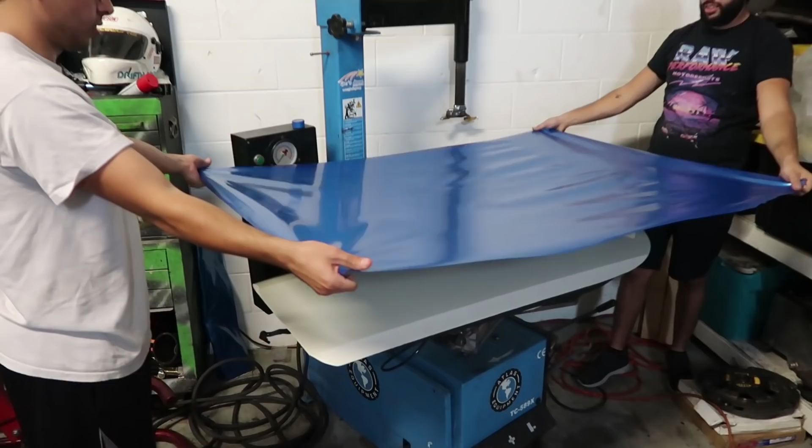Tandem number 2, okay ready? You're gonna pull all the way apart. Towards you and to the side, like this. Okay, go, pull, and then your left hand down a little bit. There we go, ready? Go down, down, down, down, go down, go down.

Alright, that's pretty good, you're good. You can let it go. That's pretty good, the wrinkles are for speed. It's ribbed for our pleasure.

Oh God, so what else are we doing today, Matt? Well, what aren't we doing?

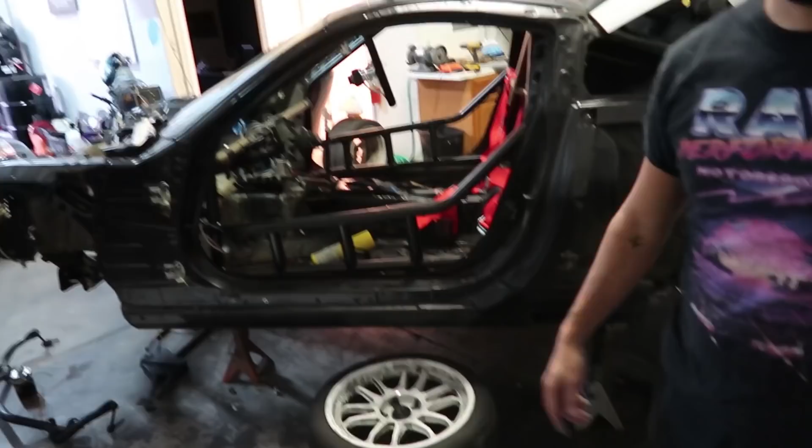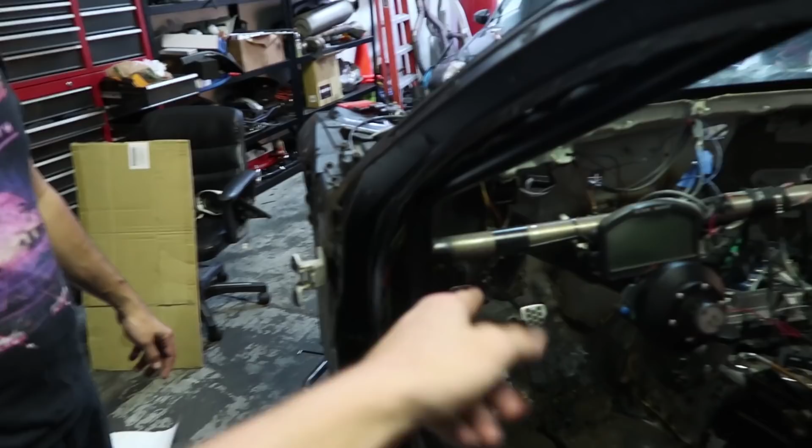Actually, you need to do your clutch pedal. I need to do my clutch pedal. I would like to. So my clutch pedal broke, I don't know if you've seen that. I don't think they have. So like I'm getting carried away. My clutch pedal broke at the only event we ever tested this at, and we welded it back together for that one little fun run with Adam that one time. I was like, I'm just gonna go send it. So we're gonna fix that.

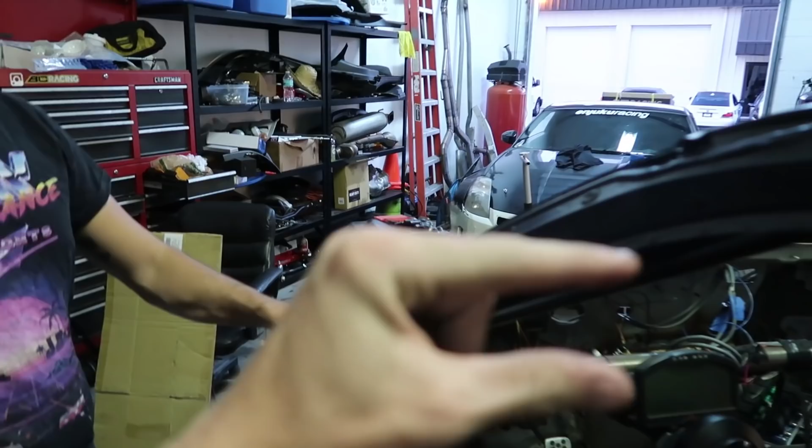What I want to do is actually make one out of steel and thread it nicely, put it all together, because it's essentially like a U, and on the bottom of the U there's a threaded portion that goes up. The U goes around the clutch pedal, and the U portion with the thread goes into the shaft of the clutch, like the master cylinder.

Okay, you're talking too much, take it off and show them physically. That'd probably be easier, some people are audible people, others I guess, if everyone sees it then you can see it. Yeah, you can say it while they look at it. But they're getting to wrapping over here. Come here, I'm going over here.

Where you can see the motor is almost in. Well, it's like a couple nuts and bolts, just a couple. Boxes are here, boxes of almost everything are here. Parts, bunch of goodies that we'll get into later. It's used. I also have parts of my car that I haven't shown you yet. Okay, you need to get those out, scratch them off the line.

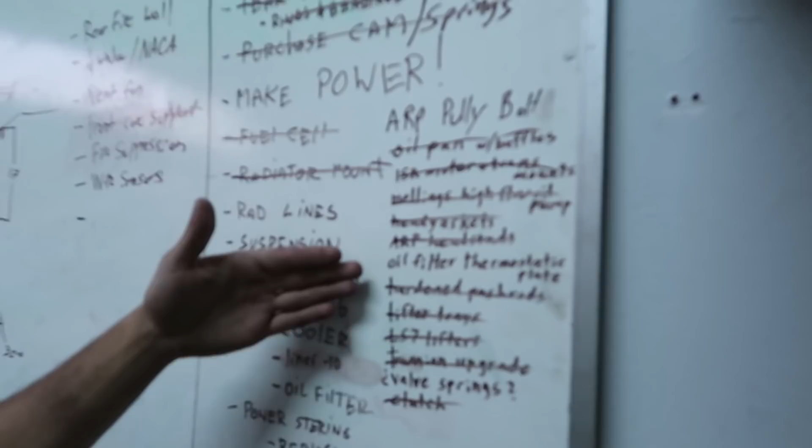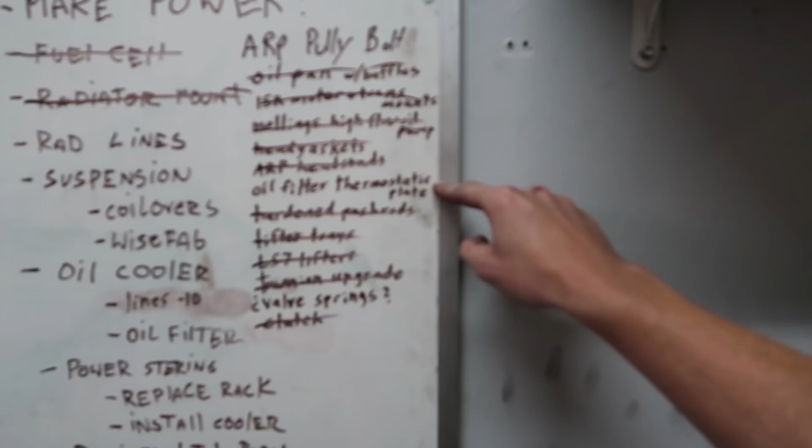All right, so all this stuff is ordered, and here, and here, yeah. This thing, we'll get that locally. I still gotta order that. Yeah, I ordered comp cams, hooked it up with cam too, right with here, cam and springs.

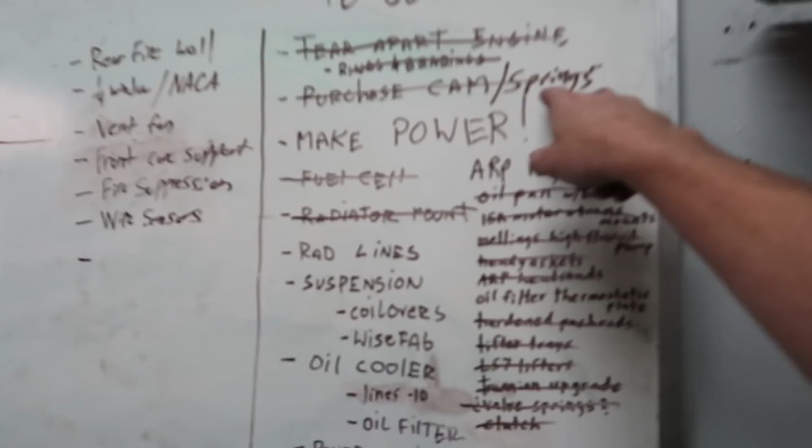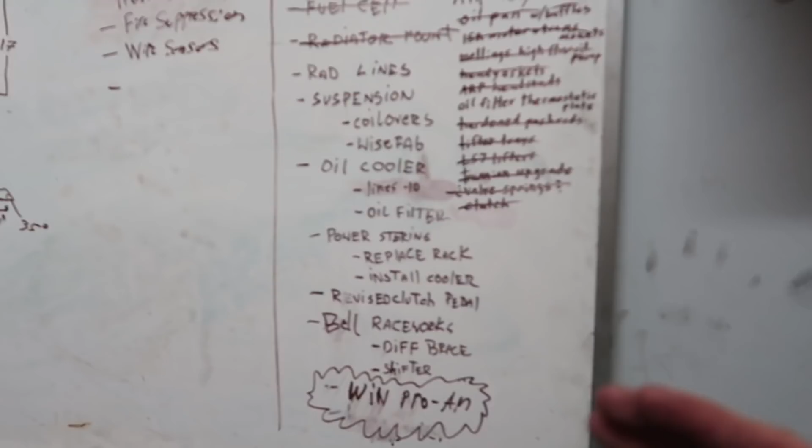Oh yeah, valve springs. So with comp cams, they came out with like a new drift spec cam, and what it is, it's a cam that you can essentially drop into a stock motor. I opted to upgrade valve springs because that was one of their recommendations. The other thing is the timing chain. The timing chain we had decent tension on, and it looked new since it was like a fresh build, so I opted to not do the timing chain, but I did springs.

I'm gonna do their comp cam. I guess Marco puts the link with, I don't know, something, and they're like mild specs, it's like a 541 lift.

I'm a little worried with Hasm back there handling that big stick. I don't know how I feel about it.

But yeah, so we're gonna put that cam in, and I don't think anyone has ran it yet, it's like a brand new cam, brand new by them. And it's supposed to be just genuinely all around kind of bring up power from like 3,000 to 7,000 RPM if you're gonna run that high. But it's just a mild cam that you can drop in, no other upgrades whatsoever, and it'll be great for like a grassroots series or mild competition, which is what I'm gonna be doing.

Or even guys that want to do some road course stuff that don't really want to do a total overhaul on their motor and heads and everything, and they just want to make a little bit of power all around without having to spec out a cam. Basically, it keeps the LSA around 115 and just gives you lift and duration. So most cams out there, even if they're mild, they lower the LSA because they want higher power at the top end of the RPM.

What is LSA? Lobe separation angle - has to do with the lobes on the cam. I don't necessarily 100% understand it, I just kind of know what it means. But basically a higher number gives more of a linear torque band. Mine is the same on my S13. Most people for drag racing run like a 111, 112, or 110 - they get real low and their line is more steep. So they have less power in the bottom range of the RPM but more power in the top range, which is good for drag racing because you won't lose grip launching off the line, and then you make all that power after you've caught grip. But for us, which are drifting, you want to gain grip all around, especially in drift, which is loss of grip. I'd rather have a little bit of power everywhere than a lot of power in one spot - and that's what that cam does.

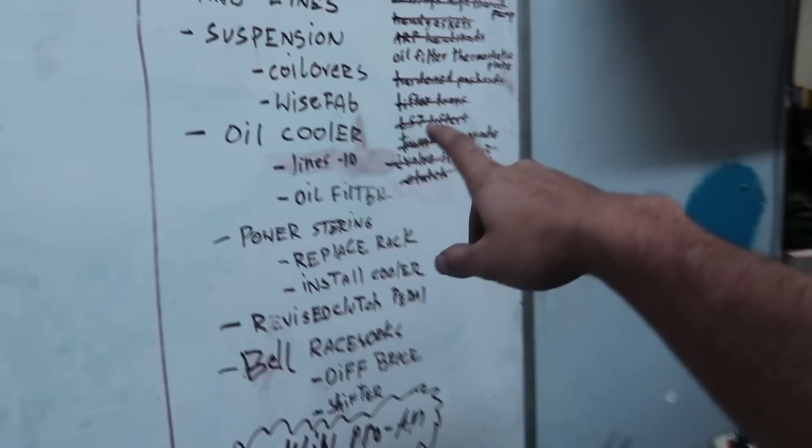Anyways, back to the list. There's a lot of stuff still going on - we're waiting. Well, we have those, but we don't have that, so we can't do anything.

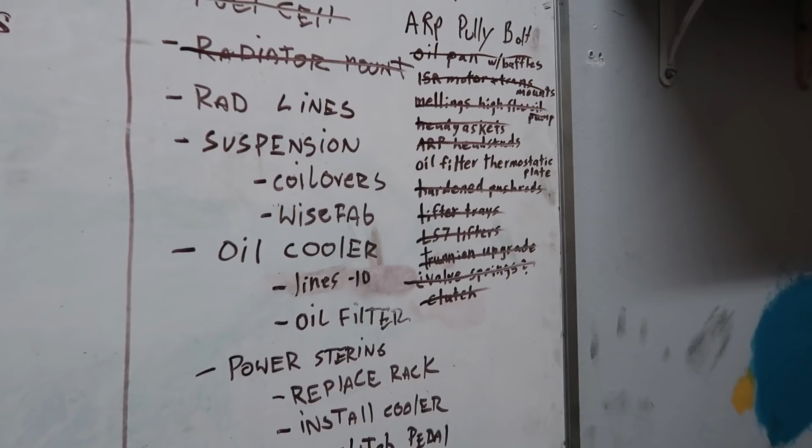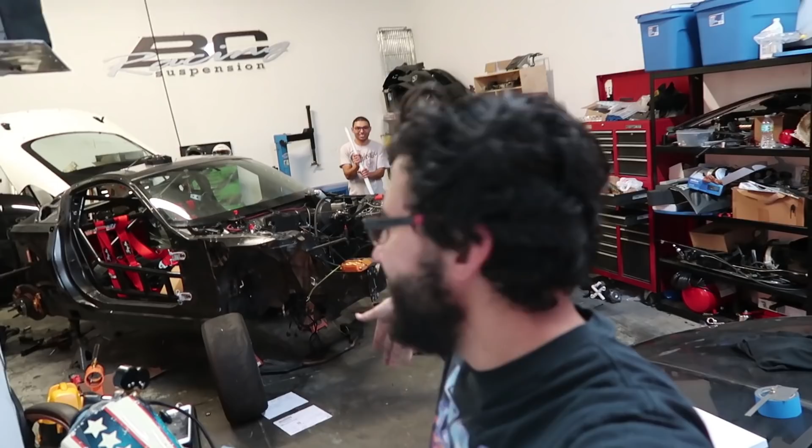Suspension is a blur - but why is that a blur, Marco? If only we had some sort of box over there to open. You know what, you can open it. Go ahead, yeah you can open it. We can open it, but the installation video won't be today because we have nothing else to attach it to. So like, what are you going to attach the top hat to the chassis and let it dangle? Dude, I just didn't want to look at it. Marco's been sitting here - it's been in the shop for like 5 days now and I haven't been able to. This is like Christmas to me, honestly. Hey, I'm sincerely - I've never messed with ERs either.

The cool thing about this, and why I have these ER series, is BC Racing hooked it up with not only one set of ER series, but 2 sets. So what I'm going to do is set up this car with one set of ER series, and set up my other blue car as well with ER series too. They'll be the same setup so I'll have the same chassis feel between both cars - except one will make 200 more horsepower than the other, and this one will make a little bit more grip because it'll be set up slightly different in suspension, but the car's feeling should be roughly the same. So when I go from that car to this car, it won't be as much of a learning curve as far as steering feel - the actual driving, throwing it in, catching, all that stuff will be the same, it's just powering out that won't be. That was my goal, because it's turning into essentially a party car / practice car where I can have fun and really push the limits in that car. And then once I push the limits there, I can come to this car having gotten a lot of practice in without putting a lot on the line.

You're taking way too long to open this box. Like no, to open this box. I know, each one is individually boxed. Oh, look at that - that's one corner right there. That's lighter than I expected, honestly.

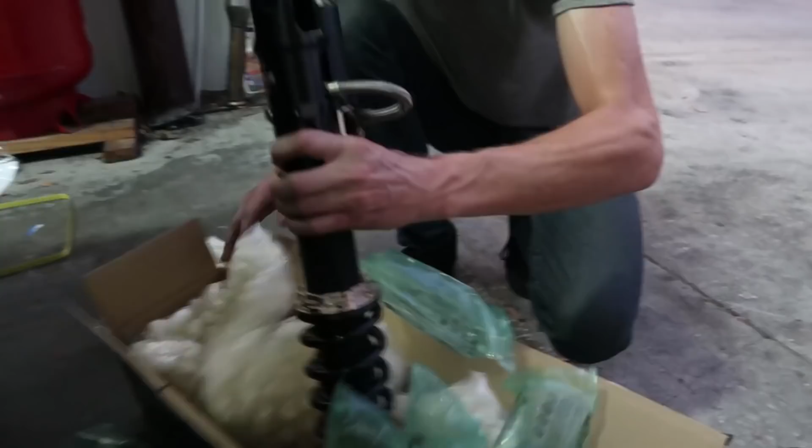Whereas with single adjustable, it's a percentage - the BRs and the DS series, everything moves together, so you can only adjust both in one direction or both in the other direction. But it's mostly rebound - the percentage is higher on rebound than compression. Also, what he didn't say, it has an external reservoir, which means more fluid, which means it won't heat up as fast.

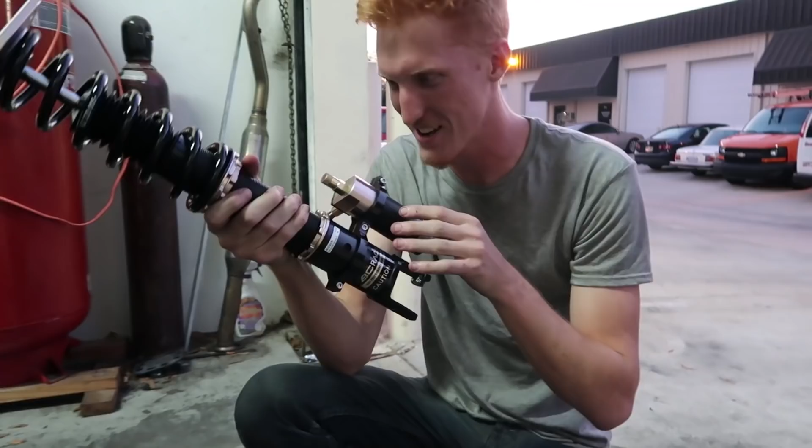It's good, it's so nice right now, I don't want to put it on the car. It looks really nice. That's a lot of travel. Is it max low right now? I don't know. Oh my god, your car's gonna be so high.

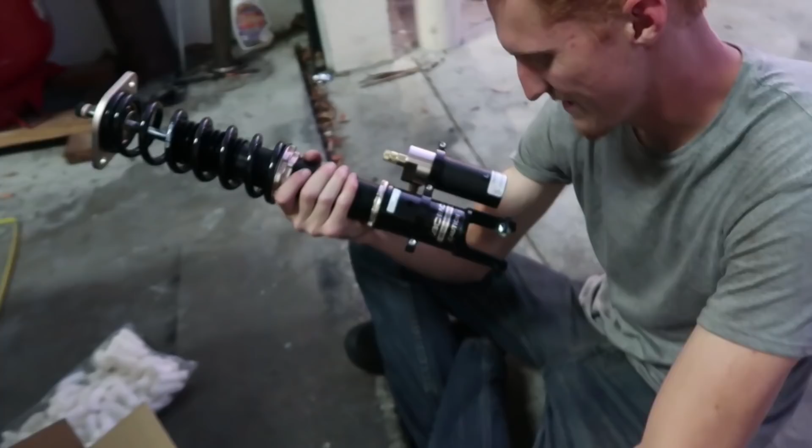So what does this do? This determines how much unicorn power the car has. And by unicorn power, you mean compression? No, damping. Compression? Damping.

Are you sure, Marco? No, I'm not sure. Because it says damping on the valve. Let me see - damping, damper, oh it says soft and hot, or high. This says damper too, but it's still compression and rebound, right? Sure.

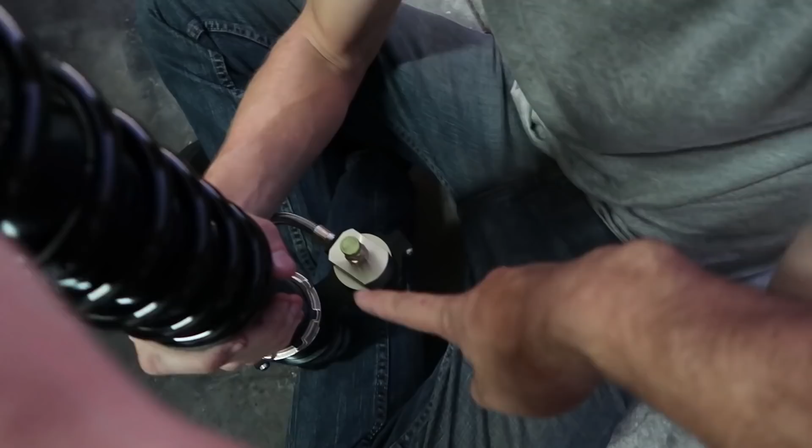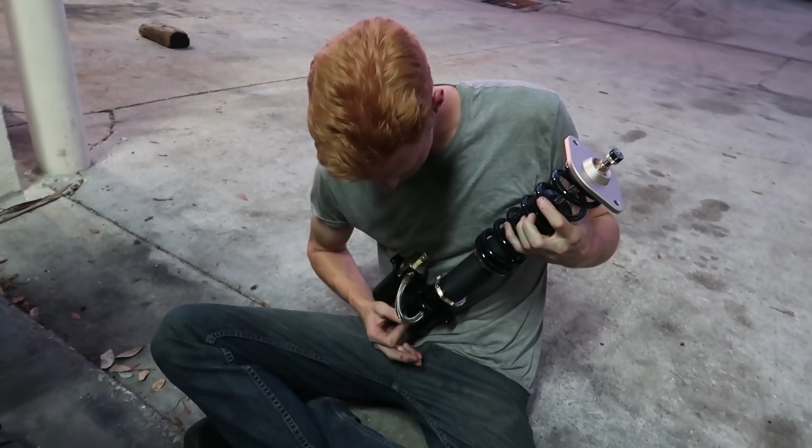Yes. I haven't read the manual yet, okay Marco? This is rebound, this is compression. So hold on, what's the difference? They're all damping, they're all dampening. Oh my god, they're dampening. They're long enough, Marco, you should play air guitar with them. Bow bow bow, oh it's probably like this. No it's like this.

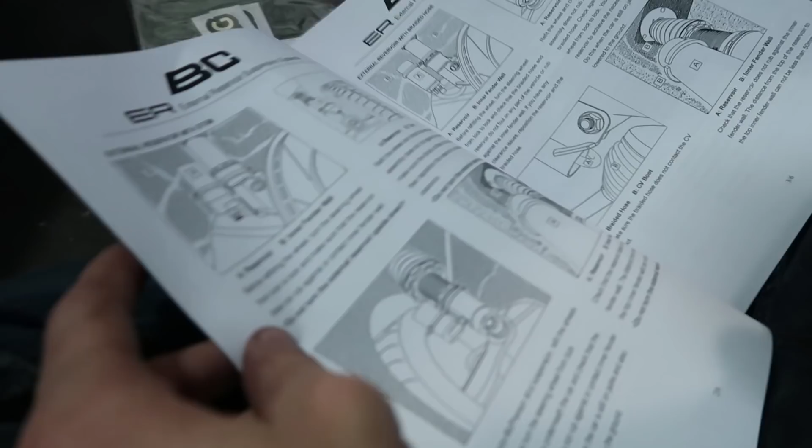I'm playing the banjo. This thing's long as fuck. Like every other car person ever, man throws the manual on the ground over there in the corner by the trash. I actually read the manuals. Okay, go ahead, let's look at it, let's see what it is and what you got to do and what it looks like. Oh, look at the pretty pictures, don't read this stuff, just look at the pictures. I know, well they didn't give me any colored pencils to color it all in. Oh, what if you do color it in? That'd be hilarious, and then we hang it on the wall. We're going to have to do that. We'll have Megan color it in.

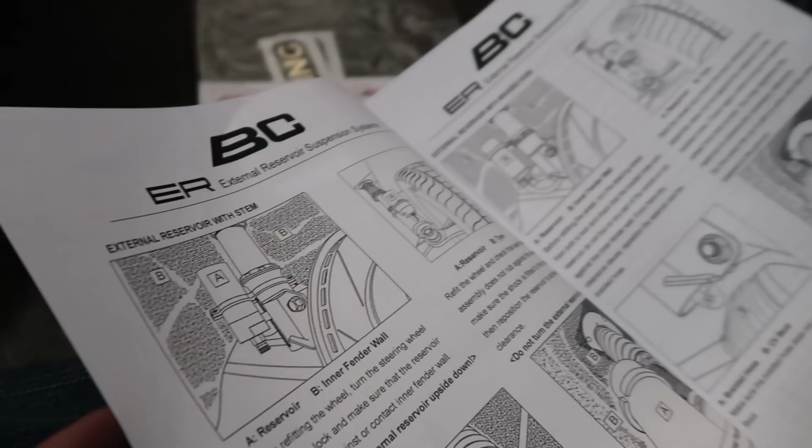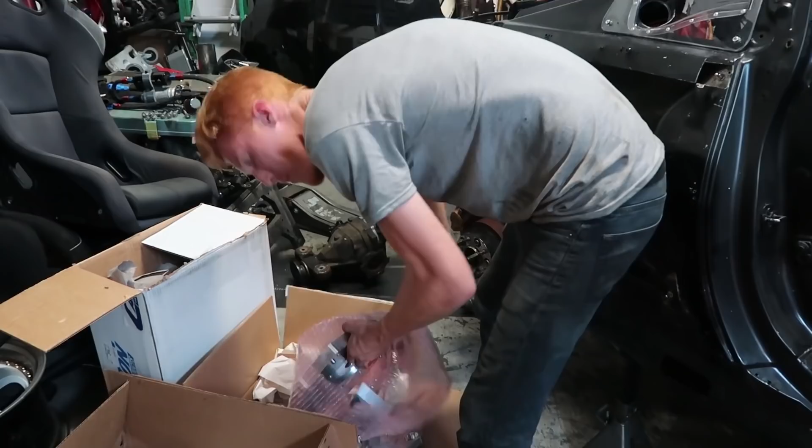So the dampening force - don't say dampening, there's no dampening - the dampening force is 30 clicks rebound on strut top like I pointed, and compression on canister like I pointed, and then preset on 60 clicks. 60 clicks, 60, oh my god, I'm done reading. That's it, y'all could just buy your own and read it yourself at home.

Matt got his old rack out and he put his new rack in. Rack out with your wrench. Also got some other cool parts.

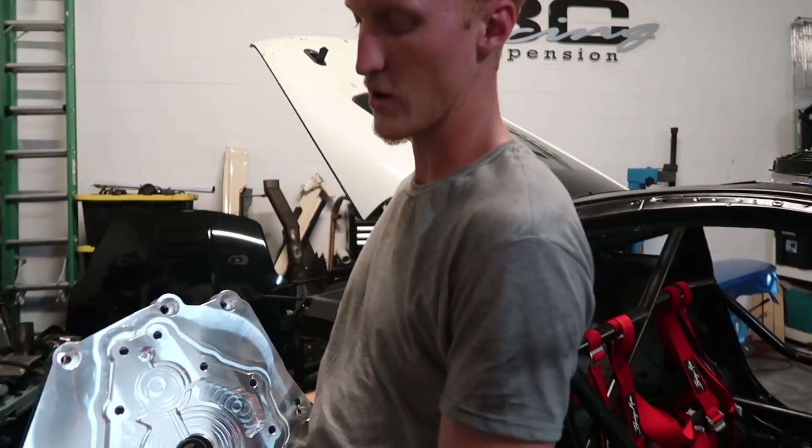This is from our boy Bert Collins over at Collins Garage. They do Collins adapters - adapters for everything, like if you need to go from a 350Z transmission to an LS, he's your guy. Well, anyway, this is a transmission cross member.

And I have adjustment there, so I can adjust that transmission - it adjusts depending on what motor mounts you have. If your motor mount sits your trans further back, then you put it further back; if it sits around there or forward, whatever. So not only this, but also we got a fresh adapter plate.

If I can find the opening. Come on. Quality bubble wrap, you're gonna get it out. Oh my god, it was just in there.

Anyway, why is it so warm? Oh, it's in my car. It retained all that heat.

So this is an adapter plate for the 350Z transmission. You cut your bell housing, and this part replaces that front piece - I guess it's not a pump seal like on automatic transmissions, but there's that front metal plate where your input shaft goes. It's upside down, isn't it?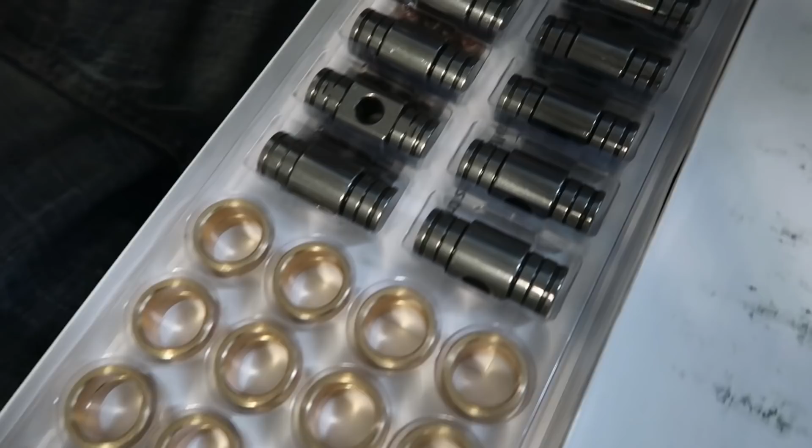Yeah, it's probably like this. Yes, because your clutch lines come out there. So this mounts up to a bell housing, and then that bell housing mounts up to your LS motor.

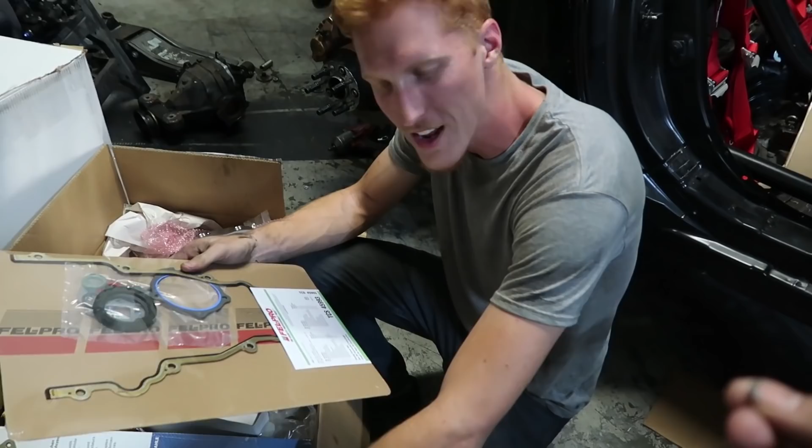Yes, Collins, so this is like perfect. So if you need to adapt a transmission - since we already have our 350Z transmission for these swaps - we just cut that bell housing, replace it with the adapter, and bolt it directly to the motor, and you're set up.

He makes a shifter relocation bracket as well, so you mount the shifter and relocate that. You're in it, ready to go, ready to party.

Hasm finally finished his door. It looks amazing. It looks way better than the other one. This looks so clean.

Look, there's no pimples. He's reaching that age where you just get a few pimples, but it's not a big deal - it's not like you're going through high school anymore. It's like you're in college, having a stressful week.

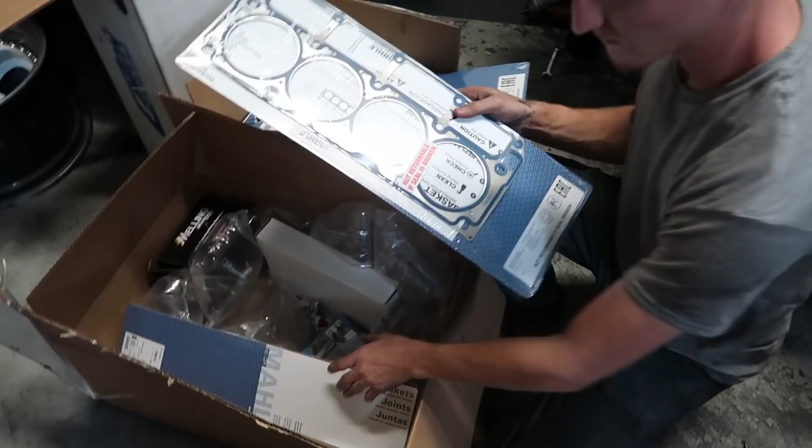Couple pop up. I do want to say though that Hasm did that mainly by himself. I helped him apply it in the beginning, and then he went and learned each corner. That was his first wrap job ever, so good job.

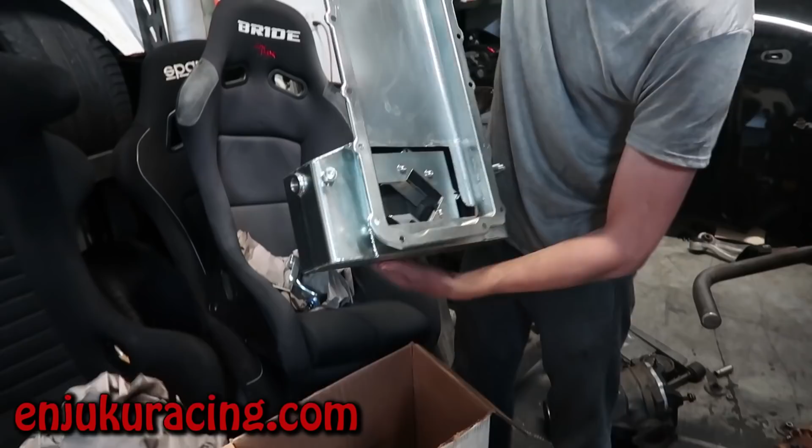And now you got the rest of the car to do. Good luck.

We also got the trunnion upgrade we were talking about, and this is the old rocker. We got to push it out - you can see the old thingies on there.

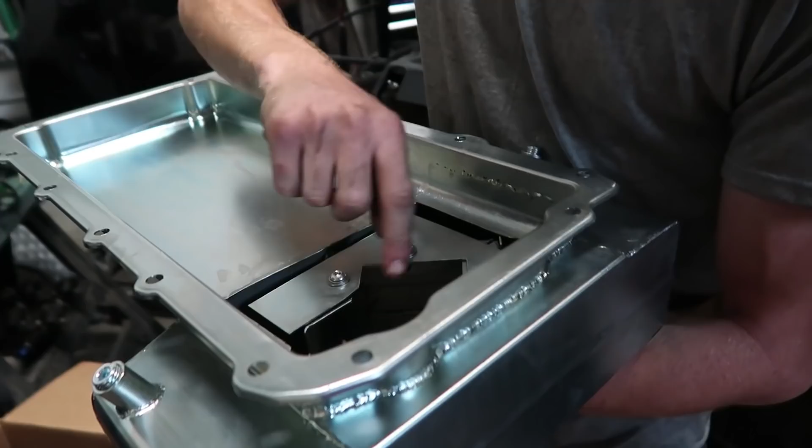We have all kinds of music in this shop - we have rappers, we have rockers. What else we got? R&B. Go ahead, open it. No, it's R&D. Ah! Look at that. Dang, this looks beautiful.

Matt, what kind of person isn't excited about new parts? There's LS parts in here. Let's go home. No, let's see it. Come on, I want to see these parts. All right, we're gonna rapid fire through this bad boy.

All right, we have a piece of cardboard. No, technically it used to be made out of cardboard.

This reminds me of when you get a present you didn't ask for, and your parents are like 'Yeah, I got you this,' and you're like 'What is it?' And they're like 'Look, this is what it is.' It's like underwear - you don't really want it, but you need it. They gotta explain it to you. Do you not wear underwear? Is that what you're telling me? No, I do. Exactly. But you don't go buy it yourself, your parents get it for you.

It's like no one wants to buy gaskets, but you need it. Otherwise your oil won't stay in there.

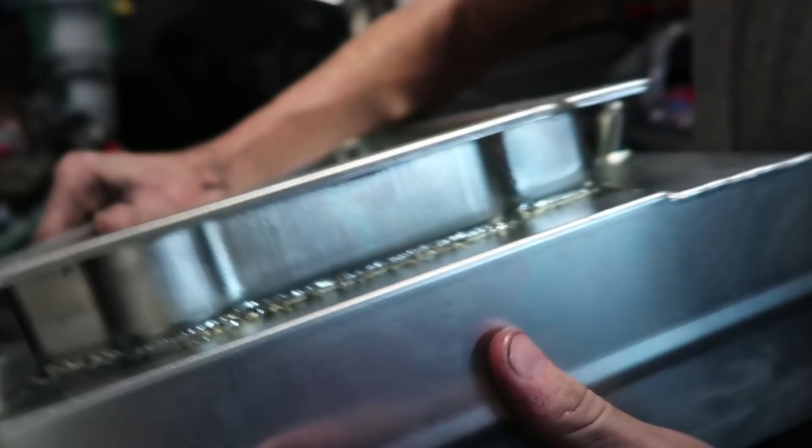All right, so we have - what is that? Front main seal, rear main seal. We have oil pan gasket. No, that other one's the front. There's the front, yes. Oh, here's the rear main seal.

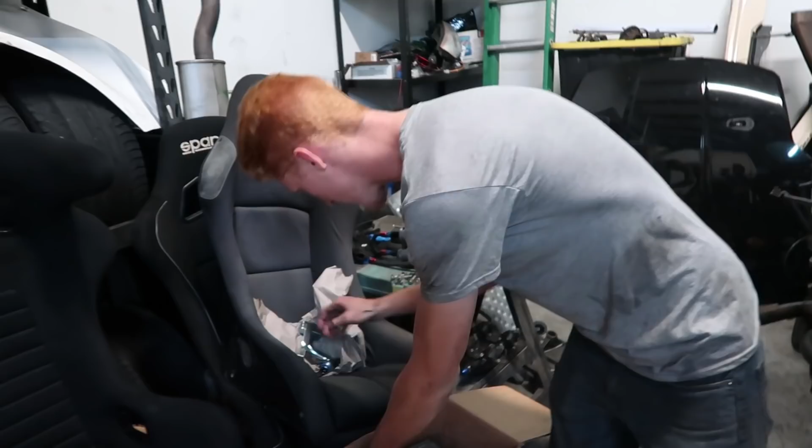Not returnable. Is the seal this seal? No, it's the plastic. I know, it's a joke. Okay, what else?

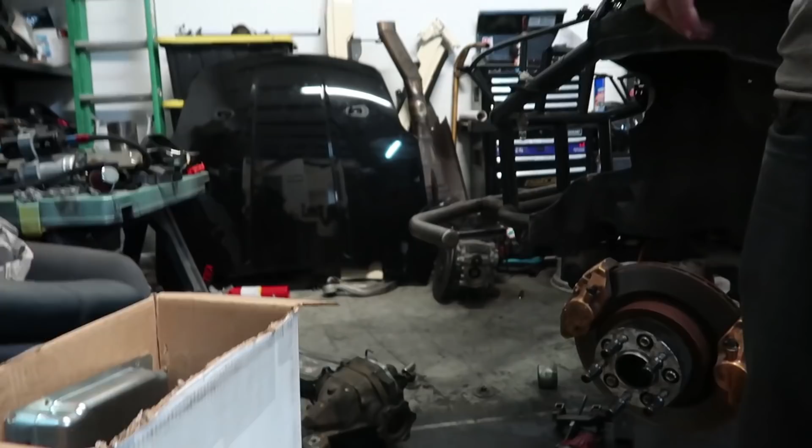What else? All right, a box with a hole - what is that? Oh, push rods. Oh, those are nice. I hope it didn't hit - no, there's still plastic in there. All right, hardened push rods, about 7.4 inches long and about 5/16 inches in diameter.

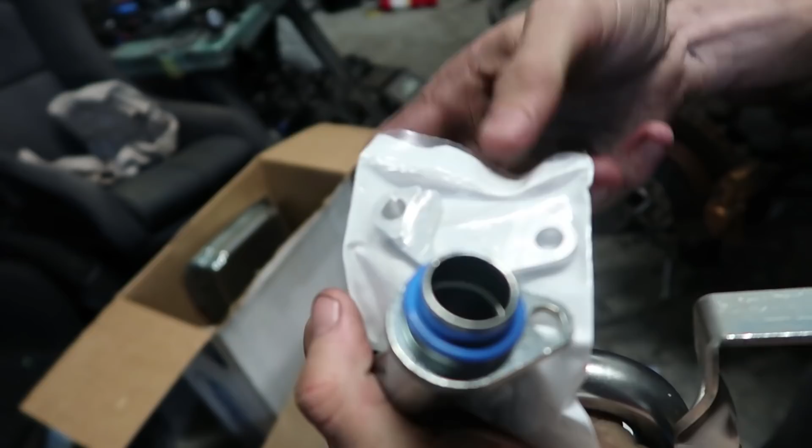So this is for my oil pan - got a Canton oil pan, which we'll discuss later. So here is the dipstick for that. Then we have gas - oh wait a minute, we're not gonna skip over this like it isn't something amazing. Okay, we'll do this.

So this is a nice little dipstick. But the nicer part here is thanks to ISR and the boys at Canton Racing, we have a brand new oil pan right here. And not just any old oil pan, this thing has trap doors in it.

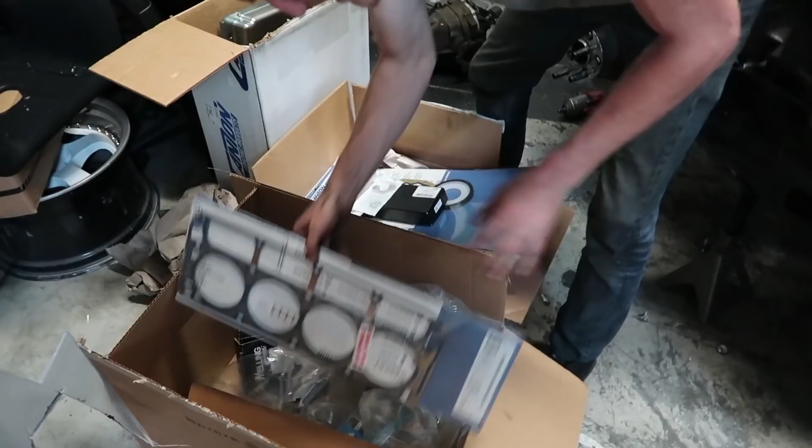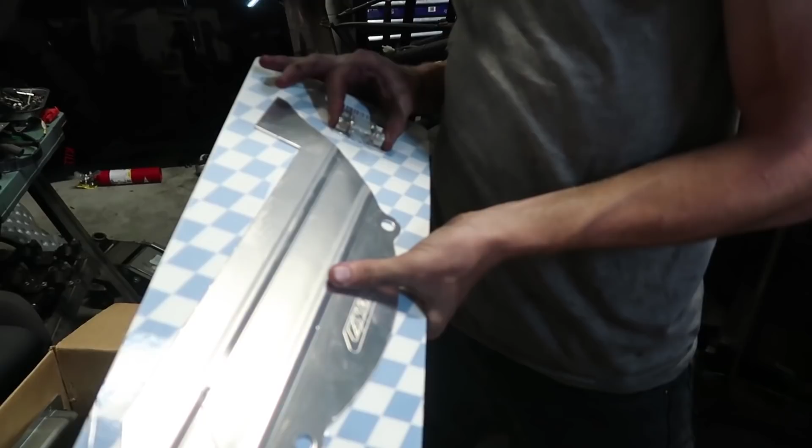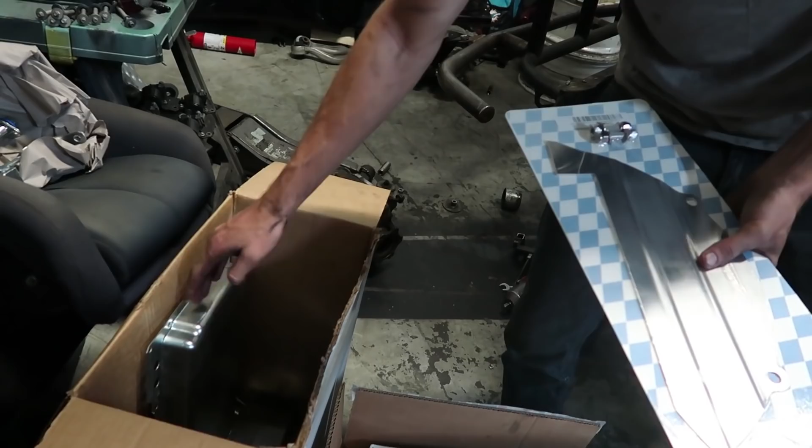You gotta finger it this way to see the trap doors. Anyway, so there's little trap doors in it. This is where the oil picks up from. But when you go around corners, oil can slosh around, and if you're going through a really tight corner, oil all goes over to one side and moves out of the way. What the trap door does is close that side, so oil can feed in from the other side where the trap door opens. Oil closes on this side, so it has a wall to hit up against. So this entire thing fills up with oil all the time, it keeps feeding oil into that center area, and it's not escaping out the other side. So when you pick it up, you're always picking up a lot of oil, so you shouldn't have really any oil issues.

And this also has baffles inside of it, so it'll keep oil from sloshing all over the place. This is very important when it comes to drifting because you're transitioning from one side to the other, your G-forces are always all over the place. I know people are having complaints about the weld quality, but honestly, look, it's very, very good quality. That's not bad, yeah. So it's a sweet oil pan, so you can get rid of that baffleless setup.

Let me see the pickup. Where is it? Oh yeah, here we go. Look at that little short stubby thing, it's a short throw pickup. And then we have something like a nice little filter. There's a piece, put this back, it's somewhere in here.

Anyway, there's one last thing that I have, another part that's in here. I don't know where it is, but this only has one bolt here. So the part that I got, it's here, I saw it. Oh, perfect. So this part wraps around here, and there's actually 2 bolts on the motor, on the oil pump, so I'll be able to pick up and have 2 points of bolting together and have a much better seal, much more reliable, since this thing's going to see a lot of G-force and vibration. I mean, not like any other motor, right? But this is just a better design, a better way to seal everything together. So that was a cheap little $15-$20 part which adds some reliability to it, basically saves your motor.